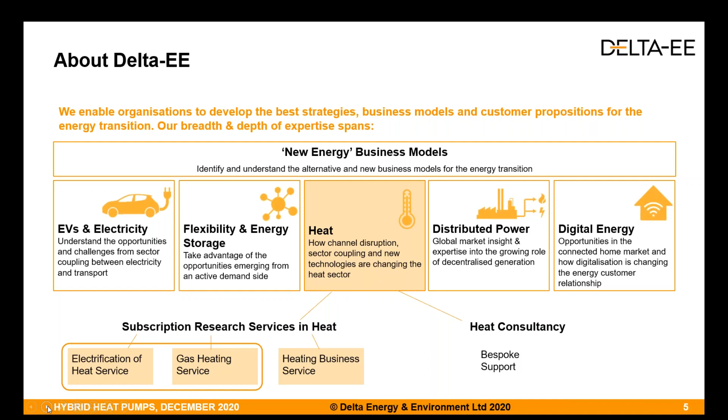So if you just switch slides, Kate. Yes.

So hybrid heat pumps are a solution which is really influenced by and driven by many of these disruptive trends. So this is the context in which we look at hybrids. So in this webinar, we're going to assess why we think hybrids can play a key role in or can be a key piece in the decarbonisation puzzle.

I'm going to then hand back to Kate, and we're going to start off with a quick poll to get everybody on their toes. I think we were going to do the what's a hybrid heat pump introduction first. Apologies, sorry, Kate. Yes, first of all, we're going to talk about what hybrid heat pumps are, just so that everyone's on the same page.

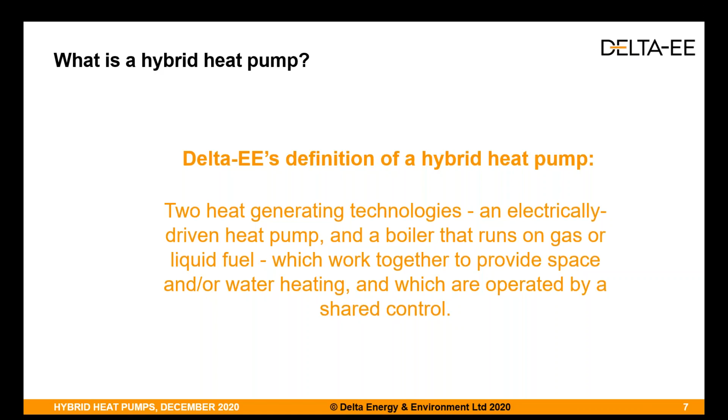And these 2 appliances have a shared control, which then determines which appliance works to provide the heating. And obviously there can be different priorities set up around that control, whether it's for minimizing running cost, maximizing CO2 savings, taking advantage of different energy prices. But the key thing for us is there always has to be a shared intelligence or shared control across these 2 systems.

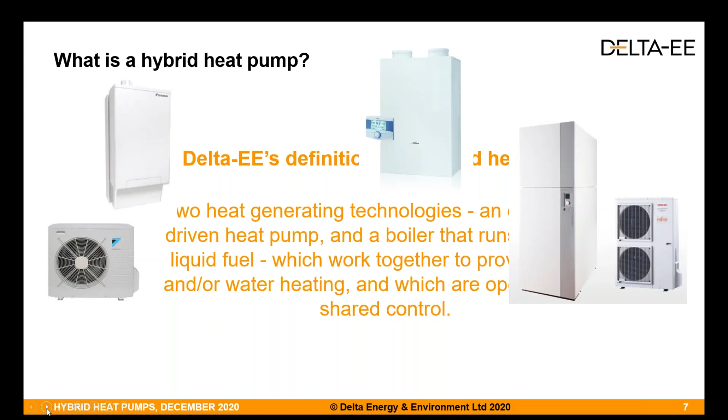And it does cover quite a wide variety of different physical appearances, different technologies, from integrated units where you have parts of the heat pump and the boiler all together in one physical box, sometimes with an outdoor unit, sometimes without an outdoor heat pump unit, sometimes just the air coming into the unit via vents. It covers units that are floor standing, units that are wall hung, different levels of integration, and it can also just look like a heat pump added on to an existing boiler.

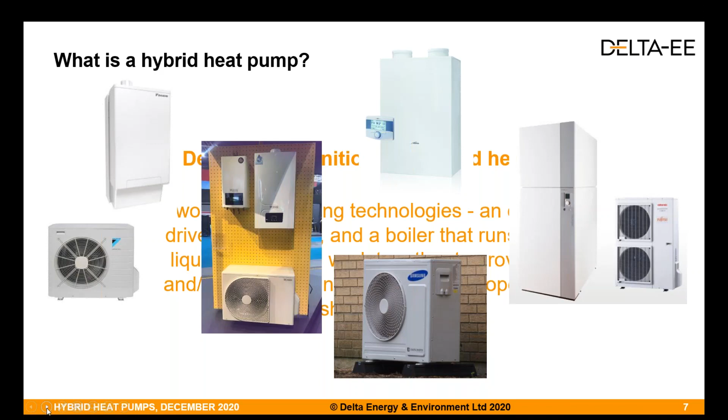So like I say, when we talk about hybrids at Delta, we're really talking about all these different kinds of technology, as long as it has an electric heat pump and a boiler and there's a shared control between the 2 of them. So yes, we wanted to just quickly, like Lindsay says, get you all on the same page. This is what we mean at Delta when we talk about a hybrid. And then we're going to do a quick poll, as Lindsay said, to get you on your toes and make sure you're all awake this morning. So yeah, Lindsay, I'll hand over to you to introduce it.

Yeah, thanks, Kate. So some of you will already be familiar with hybrid heat pumps, I'm sure. Some of you perhaps less so. So we'd like you to start off by taking a shot in the dark and tell us when you think the peak opportunity for hybrids will be, whether it will be in the short term, the medium term, or the long term. So Kate's going to launch a poll here, and you should have something popping up on your screen where you get to choose whether you think it will be next 5 years, next 10 years, or a much longer term role.

Good, we can see quite a number of people are voting. That's great. Great to have the engagement. We thought as well we'd ask you this towards the end as well to see if your opinion changes based on what we present as we go through today. So most people have voted. I'll just keep it going for a few more seconds. Last chance to get your votes in, if anyone still wants to. Okay, I think that's probably most people have voted who are going to, so I'll just close that and share the results with you.

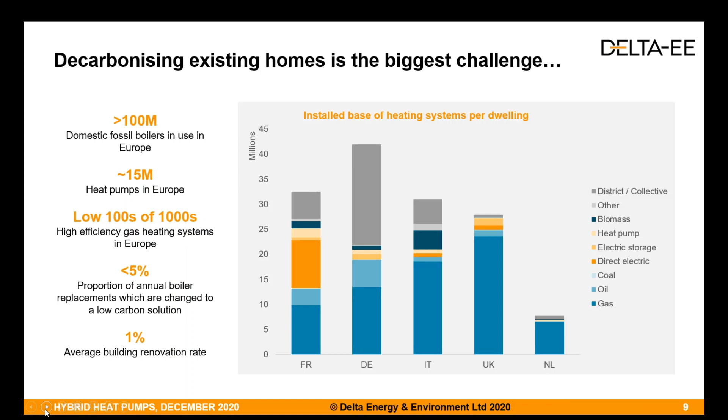So hybrids could be one of the answers to this. There's 4 main reasons why we think hybrids may address some of these pain points. The first point here, offering a wide range of solutions for existing buildings. So there are so many configurations of hybrids on the market. Kate just showed a few pictures of some of them in the introduction. There are solutions which could suit a wide range of existing buildings as a result. This includes buildings with, for example, high flow temperature requirements, which can be challenging for some other low carbon solutions.

And while there are advancements in, for example, high temperature electric heat pumps, the evidence from the market today suggests that being able to more easily meet high flow temperature requirements is one key selling point for hybrids at the moment. The second area is around tackling end user challenges. So typical challenges from end users include that low carbon solutions are too expensive to run, they're unfamiliar, so generally not trusted as a heating solution. You know, people really like their boilers.

Hybrids have the potential to overcome some of these challenges. They generally have a lower price point than other low carbon solutions, not as low as a gas boiler, but they tend to be a bit lower priced. I think the most important point is that end users are potentially more comfortable with a low carbon solution which includes a gas boiler, for example, which they're familiar with.

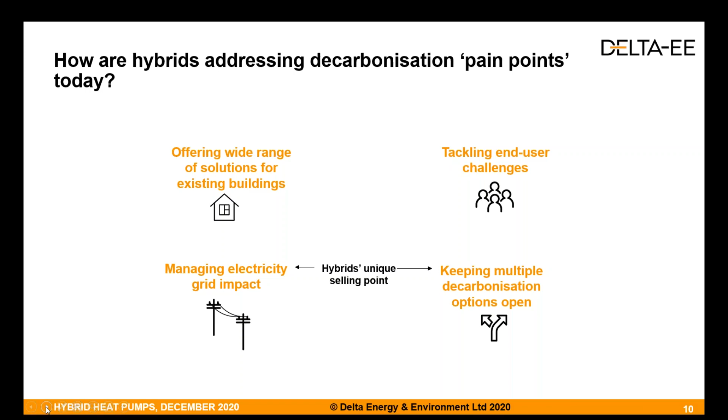I think the two final points, around the electricity grid impact and keeping multiple decarbonisation options open, are two of the more unique selling points of hybrids, and it's one of the reasons that we think we're seeing so much interest from the industry. Many players are launching products, nearly all of the main heating companies in Europe have a hybrid product on the market. So despite the fact that sales aren't huge, and we're going to talk about that in a second, they've had a lot of attention, and I think this is why. So I'm going to hand over to Kate, who's going to talk a bit about what the state of the market is at the moment.

Yeah, thanks, Lindsay. So Lindsay's done a nice summary there of the challenges that exist in terms of moving existing fossil fuel heated homes over to low carbon technologies, and why we think hybrids could be a key solution for some of those homes. Not the only solution, obviously, but we do think they could play a good role.

We wanted to assess how many hybrids are being sold at the moment. This is a number that we get asked for quite a lot, because it's quite easy, we found, for people to find numbers for boiler sales and for electric heat pump sales in the main heating markets. But finding a number for hybrids, when hybrids cover a lot of different technologies, is obviously quite hard for a lot of people, and this question has been coming to us quite a bit over the last couple of years as well. How big is the hybrids market at the moment, given that this technology could be a good solution for the future, and for homes now?

So we did some research over this summer where we gathered data from the main manufacturers and from associations, and we came up with a figure of 32,000 units being sold per year across the 5 main heating markets that we cover. So that's Italy, Germany, Netherlands, France, and the UK. So 32,000 maybe doesn't sound like very much overall, but if you think about the entire electric heat pump market last year, which was around 350 to 400,000, that means hybrids are 5 to 10% of the electric heat pump market. So that's a reasonable share, actually. And as Lindsay said, hybrids are a part of the portfolio for many of the major manufacturers.

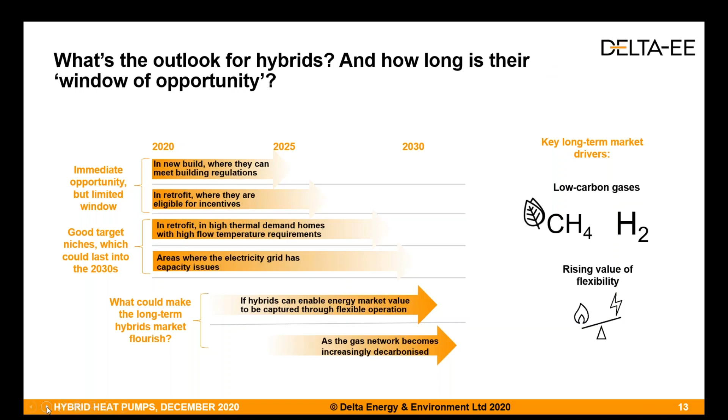We're going to run one more poll again. We're going to ask you the question which we asked at the beginning, to see if you have changed your opinion at all. We'll be very happy to see if people still have the same opinions or if we've shifted anything. So let's run this poll again. More interesting to see what you all think.

Yeah, Lindsay, just to recap, last time it was about half people voting for medium and then a fairly even split between short term and long term, wasn't it? Let's see how things are panning out this time. Okay, most people have voted. We'll leave it open for a few more seconds if anyone else wants to get their vote in.

Okay, I think we'll close it there. Seeing as it was the same poll as last time, I think everyone was familiar with the options. Close that down and share the results with you all. And yeah, pretty similar actually. Well, thanks very much, everybody, for doing that. We'll pop those into the slides, which will be made available afterwards.

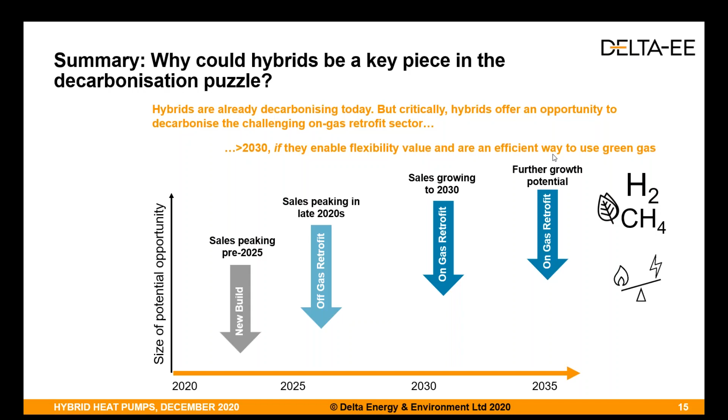That's everything that we're going to talk about, and we're going to take some questions now. You can see there's been a lot of questions being asked. So where are we? So we've got a question here: are switching data services available to maximize automatic hybrid interactions with electricity and heating oil market prices? Do you want to answer that? Yeah, okay. I'll have a first pass at that, Lindsay, and then if there's additional things that you want to add, please do. Yeah, that's a really good question.

And for us, the more this ability for hybrids to access varying energy prices as they change is available, and certainly as we see more dynamic time of use electricity tariffs coming along, the more that's going to be an advantage for hybrids. In terms of, is it available at the moment? Yes, it is possible. At the moment, there's often additional technology needed beyond the standard intelligence that comes in a hybrid heat pump to optimize the running between the two parts. You often need an additional bit of kit and some additional software to allow it to pick up those dynamic changes in prices.

Most hybrids, you can already program in static energy prices. So you can say, this is my average electricity price, this is my average oil or gas price, and the unit will decide what's the most efficient appliance for you to run to achieve whether you want lower running cost or lower carbon. In terms of accepting those dynamic prices, at the moment you often need an add-on piece of kit, but this is something that we know a lot of heat pump manufacturers are looking at making more standard and setting up things like APIs or using common communications protocols to enable the units to pick up these dynamic prices if the energy supplier wanted to send them. So yeah, we see that becoming more common in the future.